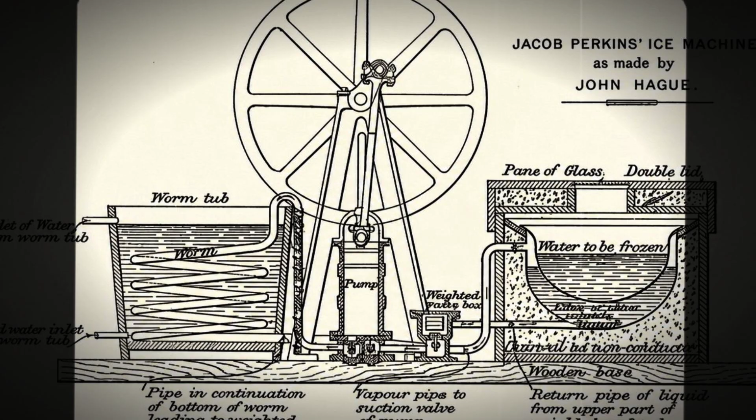The refrigerator standing behind you right now runs on a principle patented in 1834 by a man named Jacob Perkins, born in Newburyport, Massachusetts, who built a machine that could pull ice out of thin air on demand. Everything since has been trim: better insulation, better seals, an ice maker in the door, a screen that tells you the water filter is expiring. But the heart of it, the part that actually makes cold, is a 19th century concept that predates the light bulb, the telephone, and the internal combustion engine.

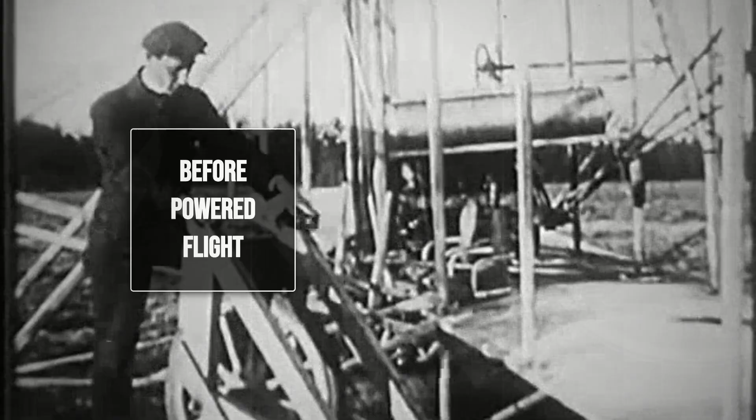You have a machine in your house that is older than powered flight, and you paid $2,000 for it.

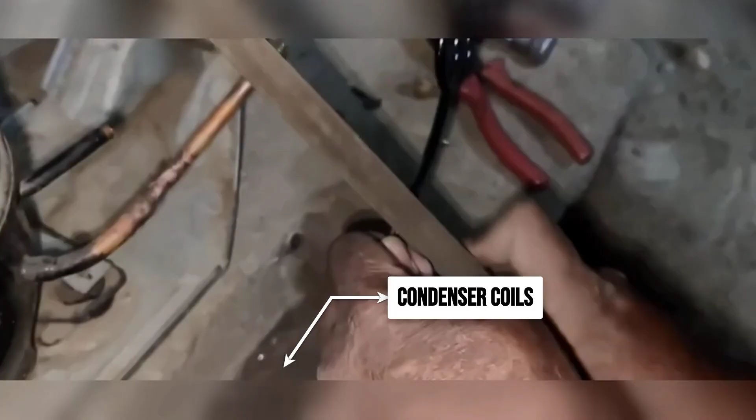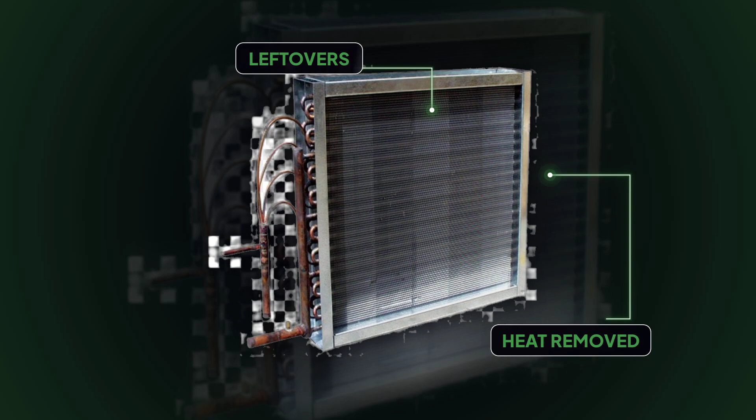Here's what's actually happening in there. A pump called a compressor squeezes a chemical gas into a tight space. Squeezing anything makes it hot, same as the end of a bicycle pump getting warm in your hand. That hot gas runs through the coils on the back or underneath, dumps its heat into your kitchen, and condenses into a liquid. Then the machine lets that liquid loose into a wider space, and when it expands, it goes cold and hungry, pulling heat out of the air around your milk and your leftovers. Then it does it again and again.

Every 8 minutes or so for 15 years, in the dark, while you sleep. It's an elegant system, and it built the modern world. Take vapor compression out of American life, and the country stops working inside of a week. Grocery distribution collapses. Hospital pharmacies lose their inventory. Half the map becomes unlivable in August. It is arguably the most important invention nobody ever thinks about.

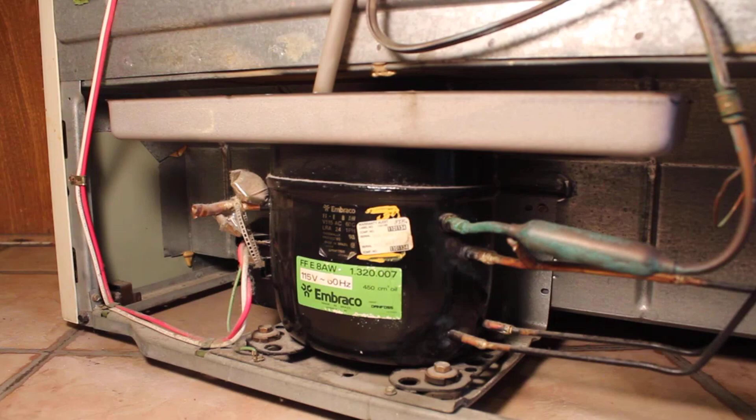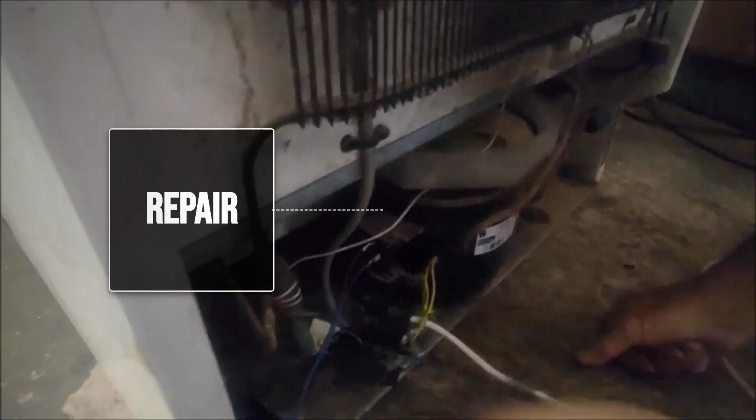It also has two problems that 190 years of engineering has never solved. The first one you can hear. It's the compressor, a small engine with moving parts, running around the clock, three feet from your food. Moving parts wear, bearings loosen, seals fatigue. If you've ever had a fridge die at 11 years old and had a technician tell you it's cheaper to replace than repair, you've met this problem personally.

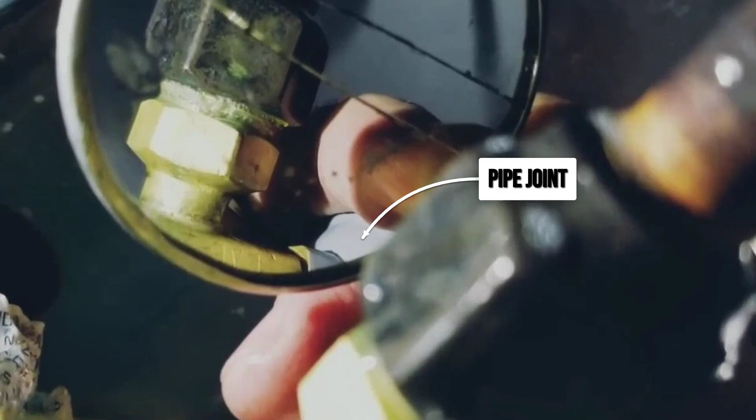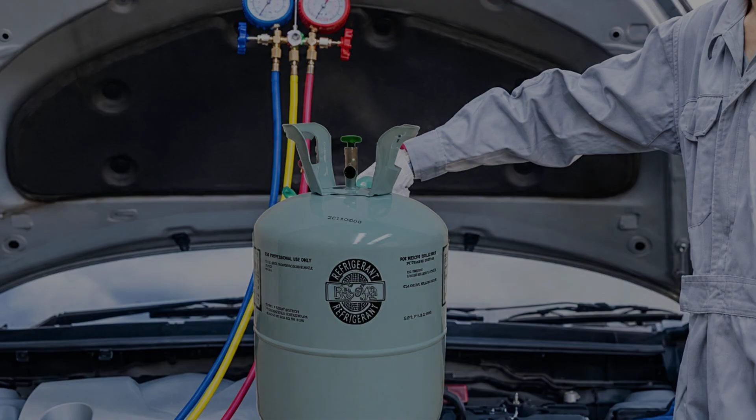The second problem you can't hear or see, and it's the bigger one. It's the gas. Refrigerants live sealed inside those pipes, and sealed is doing a lot of work in that sentence. They seep at the joints, they escape during service, they vent when the unit gets scrapped in a yard somewhere. And some of them are genuinely destructive. R-134A, the workhorse refrigerant of the last generation, carries a global warming potential roughly 1,400 times that of carbon dioxide. One pound of it doing the work of 1,400 pounds of tailpipe exhaust. Now multiply that across every fridge, every freezer case, every car cabin, and every rooftop chiller on every strip mall in America.

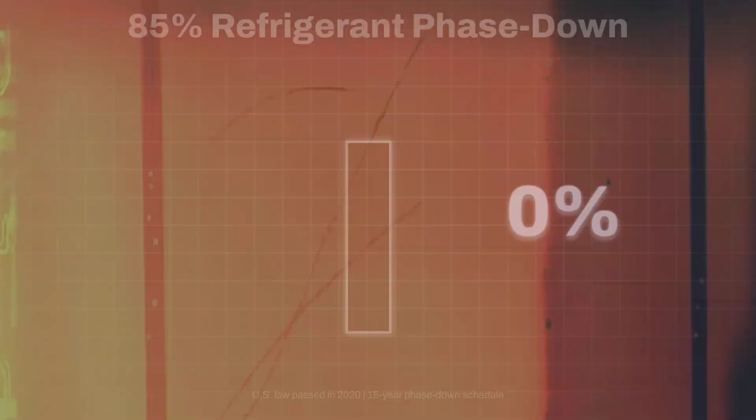The federal government already conceded the point. Under the AIM Act, passed in 2020, the United States committed to phasing these high-warming refrigerants down by 85% over 15 years. That law exists, the clock is running, and the replacement chemistry is not comfortably better. The leading alternatives are variously flammable, higher pressure, or breaking down into compounds regulators are already uneasy about. So the country has legislated itself into a corner. It has promised to stop using the working fluid the entire cold chain depends on, without a clean substitute to drop in its place. Which forces an uncomfortable question: what if the answer isn't a better gas?

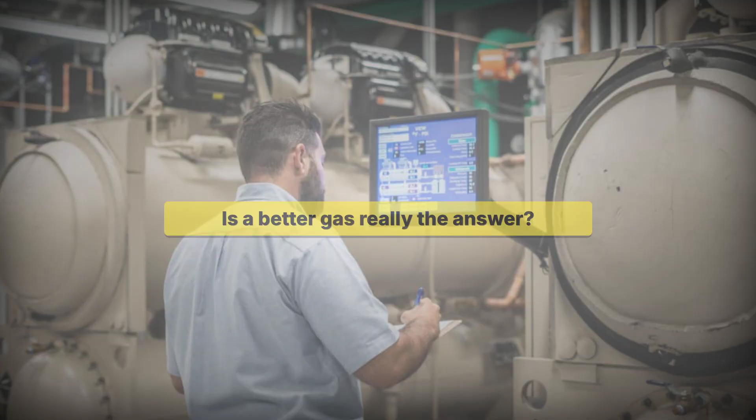What if the answer is no gas at all? Which brings us back to your rubber band.

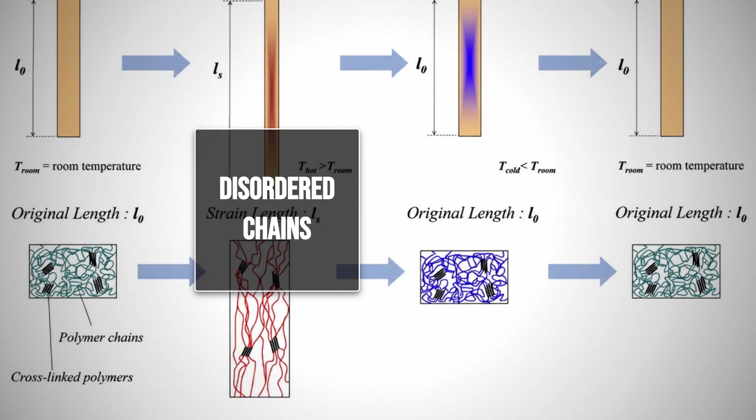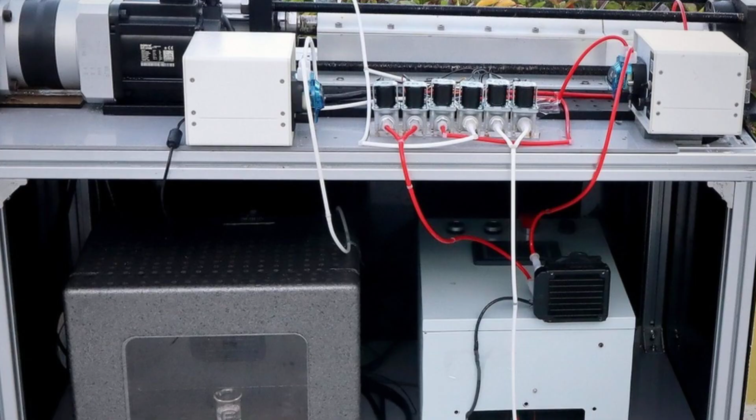That warming and cooling effect is not a novelty. An English scientist named John Gough described it in 1805, and James Joule quantified it decades later. It's called the elastocaloric effect, and the physics is almost insultingly simple. Deform certain materials and you force their internal structure into a more ordered arrangement. Order releases heat. Let them relax and the structure falls back into disorder, and disorder absorbs heat. It takes it from whatever happens to be touching it. No gas, no leak, no compressor, just a solid that gets cold when you stop squeezing it.

For a century and a half, this stayed a classroom demonstration, because rubber can only move so much heat and it degrades in weeks. Nobody had a material tough enough to do it 10 million times without shredding itself.

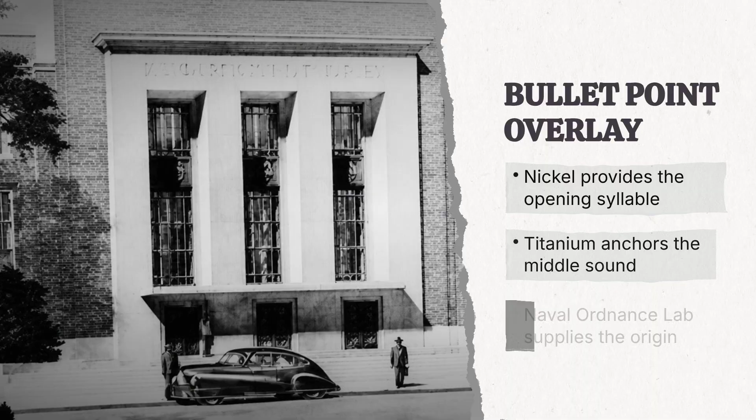Then in 1959, a metallurgist named William Buehler was working at the Naval Ordnance Laboratory in White Oak, Maryland, trying to develop a better missile nose cone. He was alloying nickel and titanium. What came out behaved like nothing anyone had handled. Bend it and it sprang back. Heat it and it returned to its original shape, as if the metal remembered what it was supposed to be. They named it for where it came from: Nickel Titanium Naval Ordnance Laboratory, nitinol.

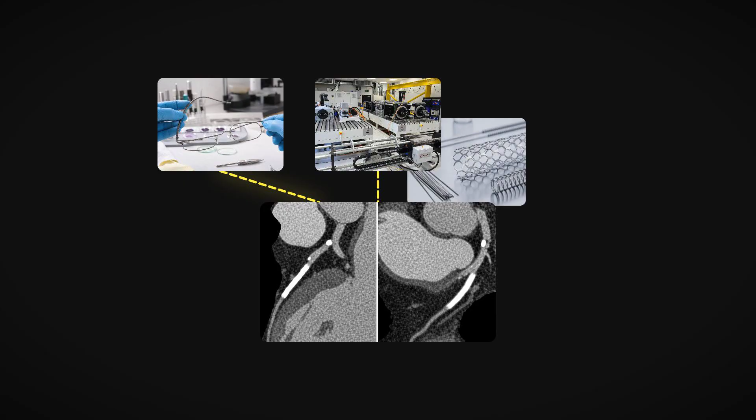An American invention, funded by the American military, and today it sits inside heart stents in millions of chests, inside eyeglass frames that survive being sat on, inside aerospace actuators. But its most interesting property was the one nobody had a use for at the time.

Squeeze nitinol and its crystal structure snaps into a tighter phase and it heats up. Not a fraction of a degree, tens of degrees. Release it and it drops just as hard, drinking heat out of everything around it. That's a rubber band with the strength of aerospace metal. That's a refrigerant you can hold in your hand and drop on the floor.

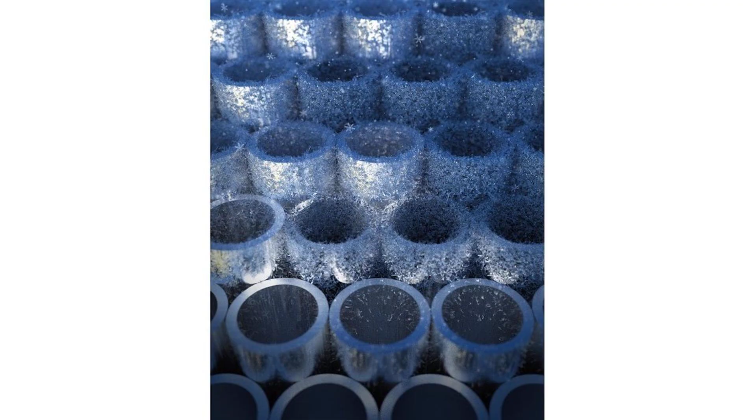The Department of Energy noticed. In a landmark federal assessment of alternatives to vapor compression, analysts ranked elastocaloric cooling at the very top of the non-vapor compression technologies with real potential to replace the compressor. Not one option among many, the top of the list.

So why isn't there one in your kitchen? The material's been around since Eisenhower. Because for 50 years, every machine anyone built out of it destroyed itself.

Here's the wall. The instinctive way to work nitinol is to pull it. Take a wire or a thin ribbon, stretch it, release it, harvest the cold. And it works beautifully for a few thousand cycles. Then it starts to fail.

Think about what pulling actually does to metal. Any tiny flaw, a microscopic void, a rough spot, a grain boundary, becomes a stress concentration. Pull, and that flaw opens a hair. Release, and it closes. Pull again. Every cycle widens it a little more. It's the same reason you can snap a paperclip by working it back and forth 20 times when you could never snap it in a single pull.

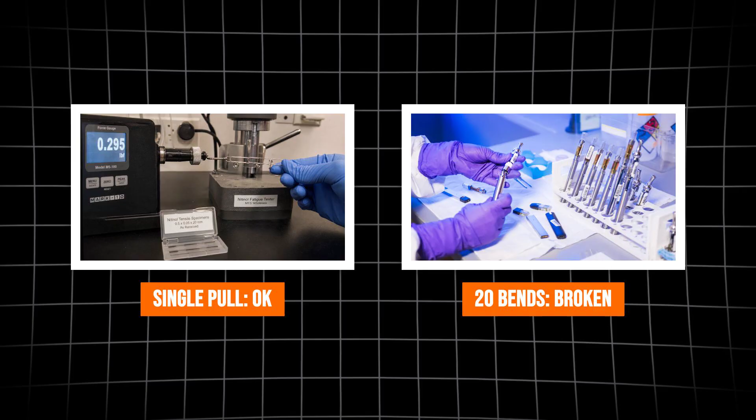Metal doesn't usually fail from force. It fails from repetition. Now consider what a refrigerator actually demands: continuous cycling for 10 to 15 years. That isn't thousands of cycles, it's tens of millions.

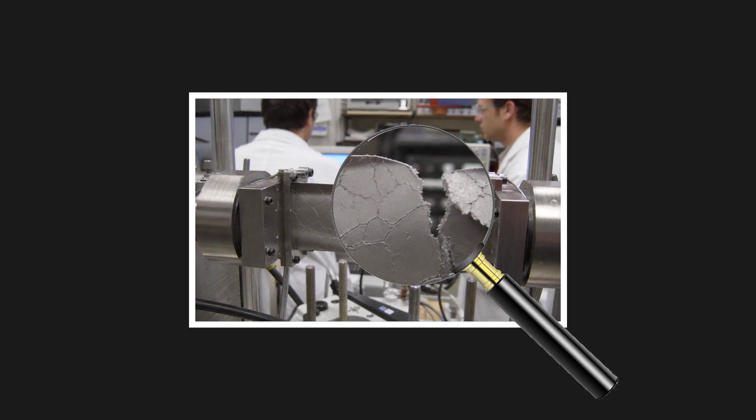Early prototypes were hitting the end of their fatigue life after a few weeks of continuous running. Researchers would build a beautiful machine, switch it on, and watch the one component doing the actual cooling develop hairline cracks and shear apart. There was a second wall right behind the first.

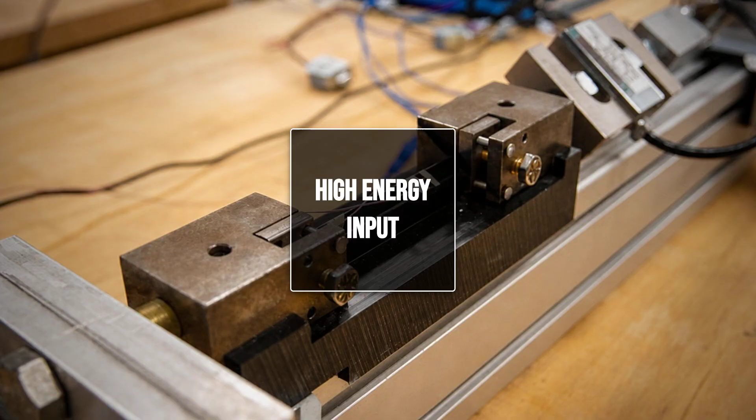Nitinol needs enormous stress to trigger the phase change, which means a serious mechanical drive. Engineers were pouring energy in to strain the material and getting back a disappointing fraction as usable cold. Next to a compressor that industry had been optimizing since the 1880s, the efficiency numbers were embarrassing.

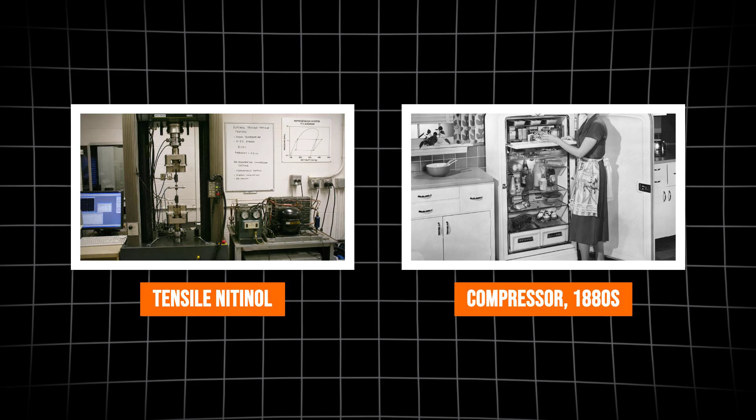By the 2000s, elastocaloric cooling had a reputation. Gorgeous physics, broken engineering. A technology that could chill a small volume very impressively right up until the moment it tore in half.

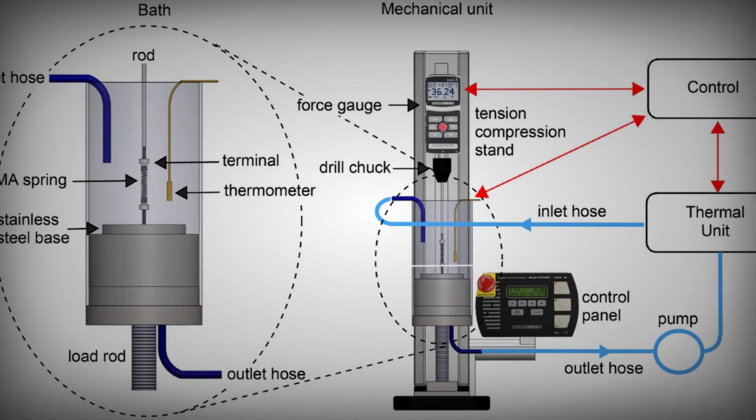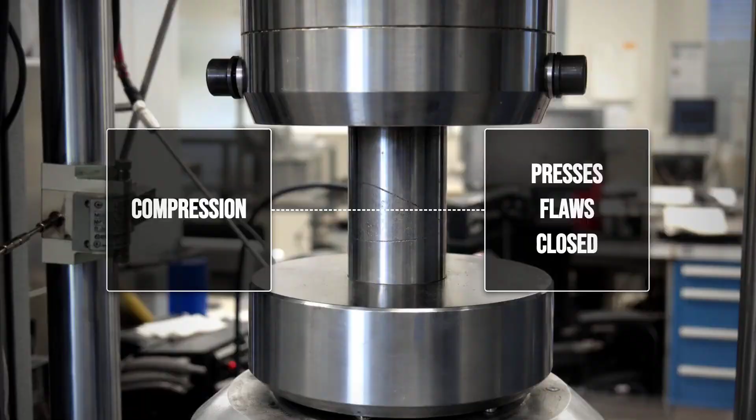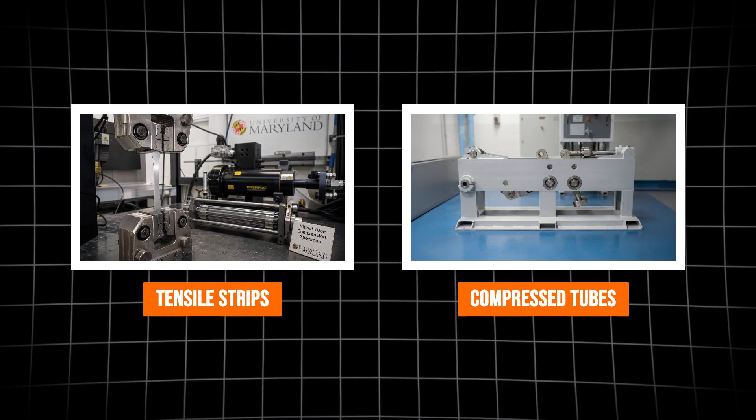A team at the University of Maryland, working with the National Laboratory System under materials scientist Ichiro Takeuchi, asked a question so simple it almost sounds like a joke: what if we stop pulling it? Their insight was about the direction of force. Cracks propagate under tension; pulling opens flaws. Compression does the exact opposite, it presses them closed. Squeeze the metal instead of stretching it, and the microscopic voids that would have grown into fractures are clamped shut on every cycle. So instead of thin strips pulled apart, they used nitinol tubes and drove them in compression, hydraulically, along their length. Same phase change, same heat in, heat out, completely different failure behavior.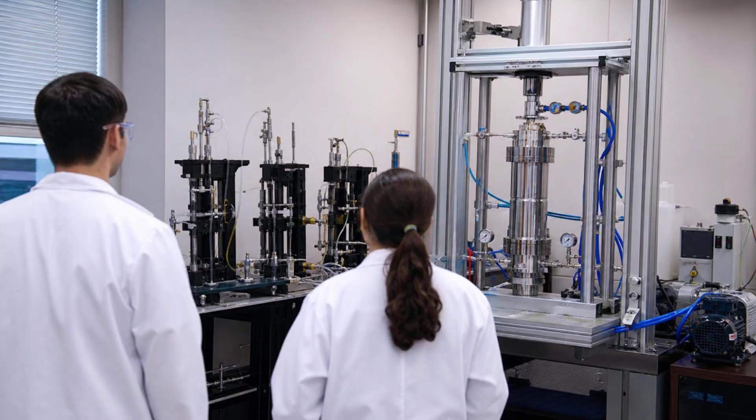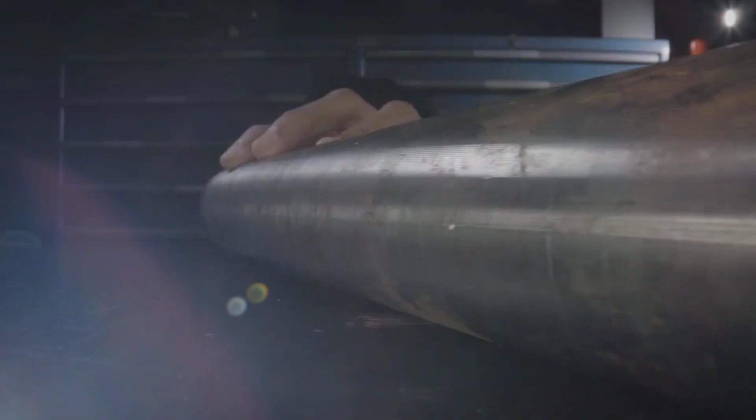The results, published in the journal Science, were the moment the field turned over. The compression-driven system didn't just last longer, it hit a material's coefficient of performance far past anything elastocaloric devices had managed, into territory where this stops being a curiosity and starts being a competitor. And it produced temperature spans wide enough to matter for real refrigeration, not the handful of degrees earlier rigs managed.

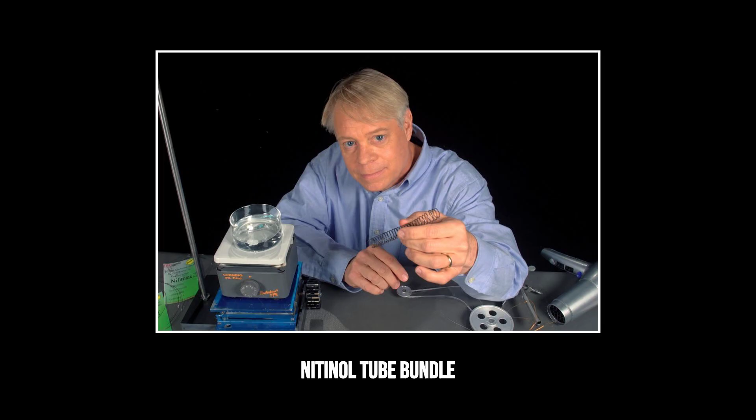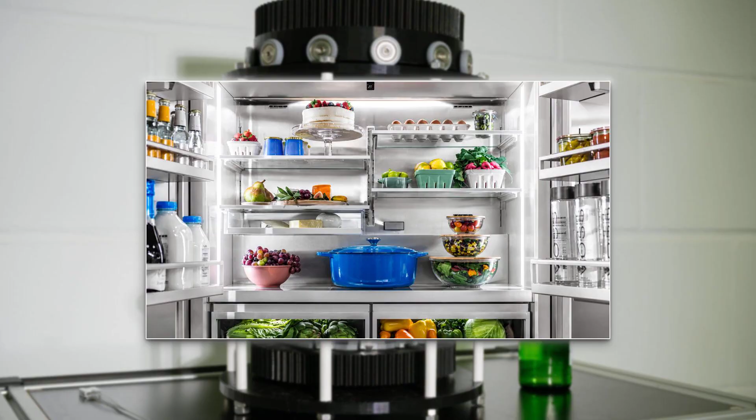Picture the architecture: a bundle of thin nitinol tubes standing like the barrels of a revolver. A hydraulic driver compresses them, they heat, and a loop of plain water, the safest working fluid on Earth, carries that heat out to the coils. The driver releases, the tubes snap toward their remembered shape and go sharply cold, and the water loop runs back through to collect that cold and deliver it to the compartment where your food sits.

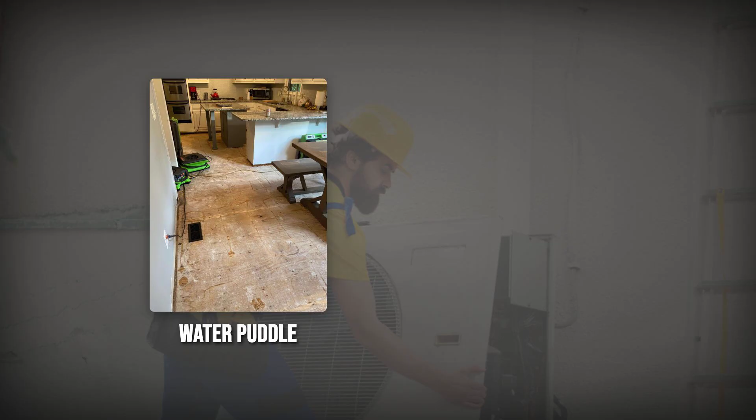Notice what's missing from that description: no refrigerant gas, no regulated chemical of any kind. If the entire assembly ruptured on your kitchen floor, the environmental consequence would be a puddle. And at end of life, you don't have a technician evacuating gas into a recovery cylinder. You have nickel and titanium, and both go back into the supply chain.

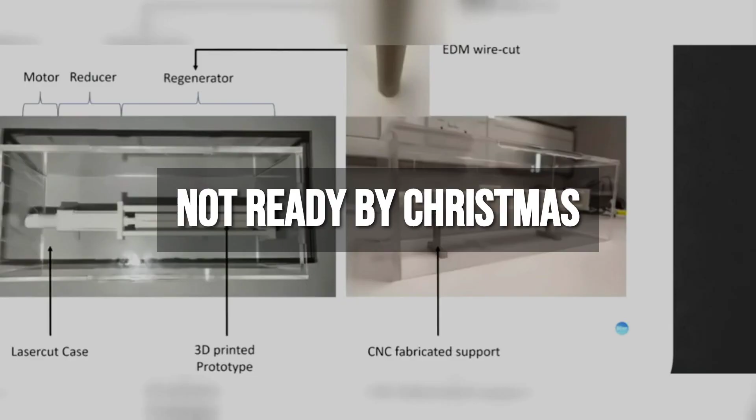Now, be honest about where this stands. There's a version of this story that promises you a gas-free fridge by Christmas, and that version is not true. These are prototypes and pre-commercial units. Impressive ones, not products. The obstacles are specific.

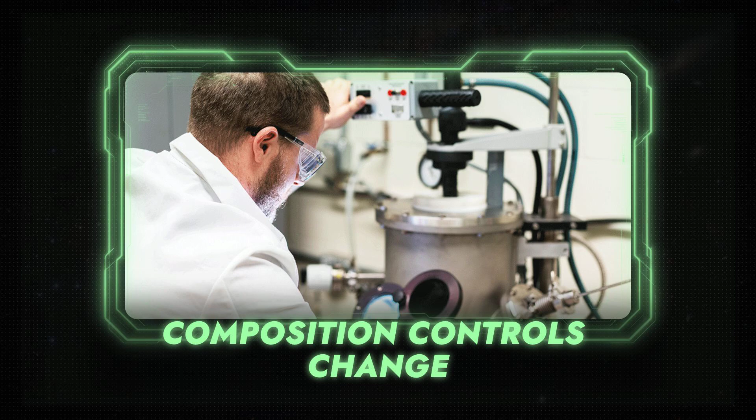Nitinol isn't cheap. The alloy has to be melted under vacuum because titanium will grab oxygen straight out of the air and ruin the composition. And the nickel ratio has to be controlled so precisely that a fraction of a percent shifts the temperature where the whole phase change happens. Compressors are commodities stamped out by the tens of millions. Precision tube bundles are not.

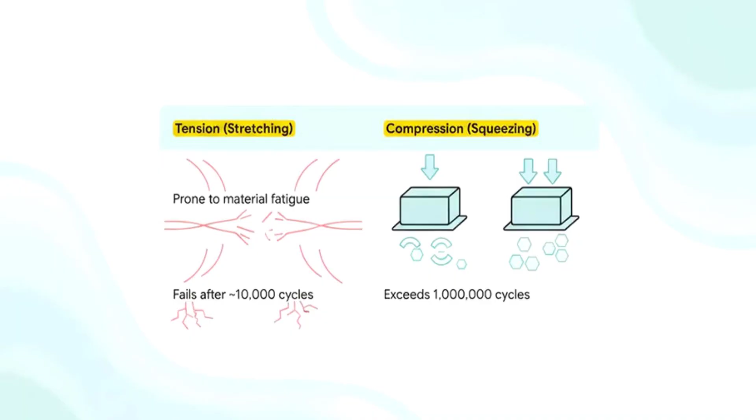Second, you've replaced the compressor but not the need for force. Something has to squeeze those tubes hard, millions of times, in a sealed box in somebody's house, and that driver now inherits the durability burden the nitinol just escaped. Third, no manufacturer ships anything into American homes without years of hard survival data with warranty exposure attached.

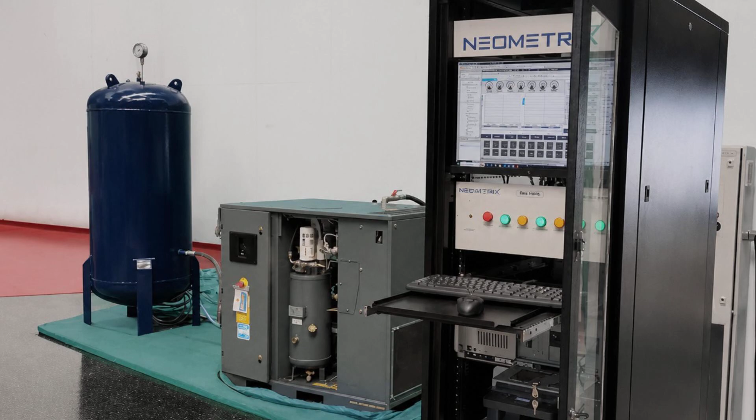And fourth, the incumbent is a genuinely excellent machine, backed by a century and a half of manufacturing scale. Beating it in a lab is one thing. Beating it on cost per unit of cooling on a factory line is the actual contest.

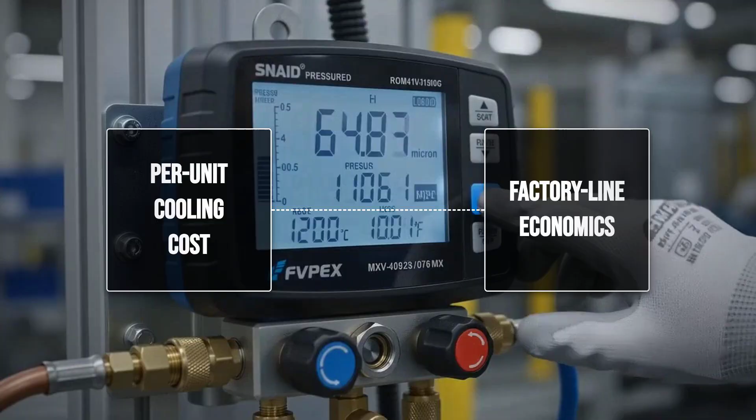But none of that erases what happened. A 50-year wall came down because somebody stopped pulling and started squeezing. That's what most breakthroughs actually look like: not a new law of physics, a change in direction that finally makes an old one usable.

And sit with the symmetry for a second. An American in Massachusetts invented the machine that made cold a utility. An American Navy lab in Maryland accidentally invented the metal that might end it. And a university team a few miles down the road found the one direction of force nobody had properly tried.

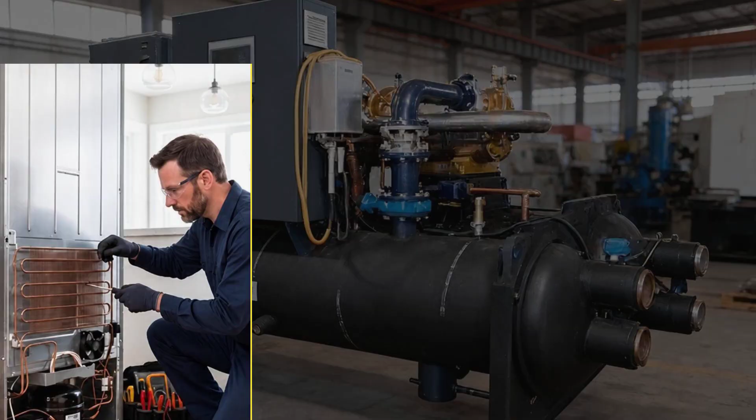Which leaves the interesting question: the compressor isn't just in your kitchen. It's in your truck, your office ceiling, the data center outside town, the walk-in cooler at your grocery store. If this scales, which one goes quiet first? And which one are you actually going to miss the sound of at 2 in the morning?